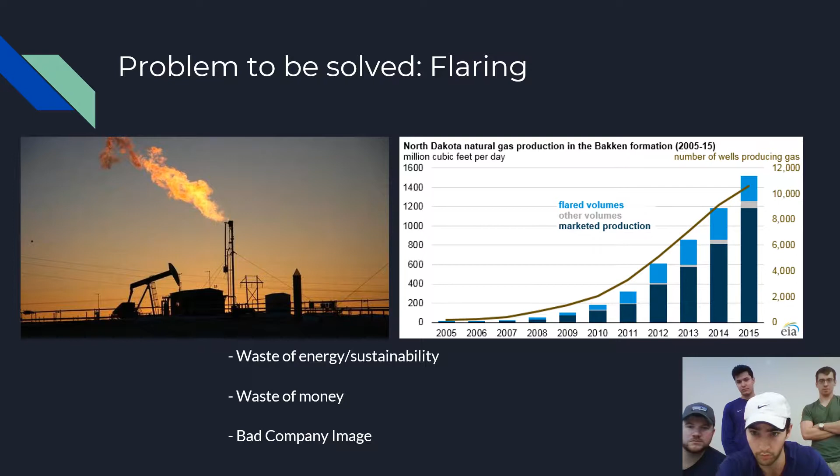As you can see from our image here, we have a picture of a well flaring, and it also shows how much natural gas has been produced from the Bakken up in North Dakota. One of the main problems is just the volume of gas that's been flared.

That's $187 million worth, 120, 158. That's a lot of money that we're just burning off into the environment, and it has negative impacts on the environment, as well as being a waste of money in the eyes of a company that could save a lot of money with our project.

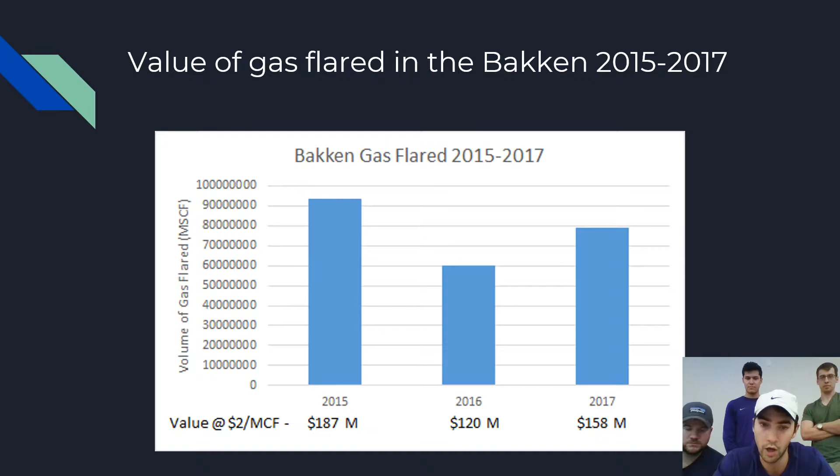So this is a problem that within a couple of years, at the end of the day, you're going to have to be capturing this gas. That's what government regulation is pushing for, and that's what our project is trying to solve.

There's a couple of reasons why we're not actually capturing this gas. But first, take note of this image. This is a satellite image, and you can see Minneapolis over here, lit up—that's a major city. But over to the left, you have the Bakken oil fields, and that's a satellite image of flaring. The fact that we can see this from space is a huge problem.

What causes this is that there are no pipelines near the well. If gas is at a low price, it's not economical to do sometimes. And it's also very dangerous to transport methane.

I was actually driving up towards Shreveport, and traffic got stopped at 10 at night—one of the tankers, one of the 18-wheelers, had blown up. So it's a dangerous business. Justin's going to take over here.

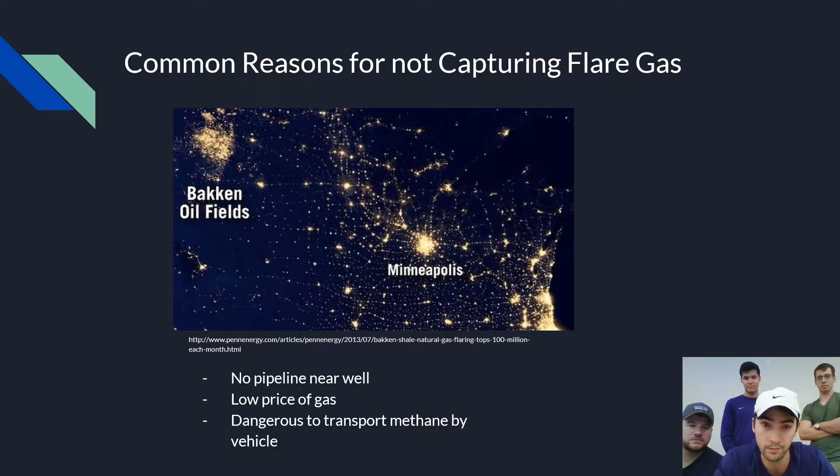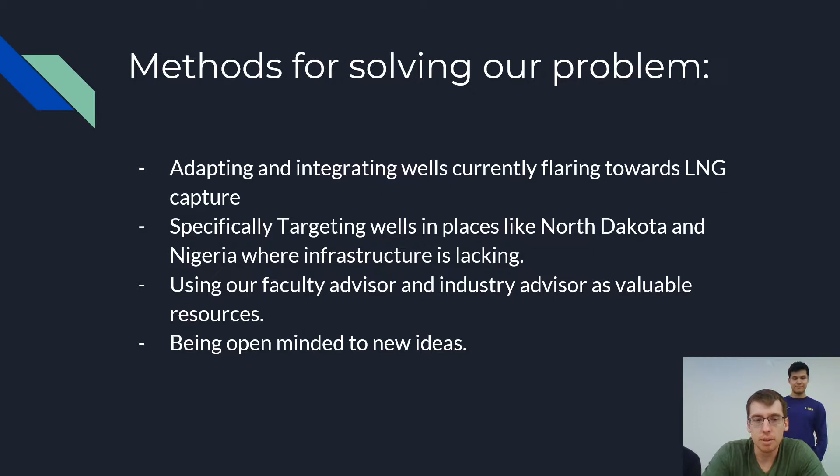We went over some of the methods to solving our problem. We looked at gas flaring and determined that liquid natural gas production would probably be the best bet in terms of being environmentally friendly, as well as possibly making a profit. So we targeted wells in North Dakota, and brought this to our advisor, who said it was a good idea. We decided to look more into what LNGs are.

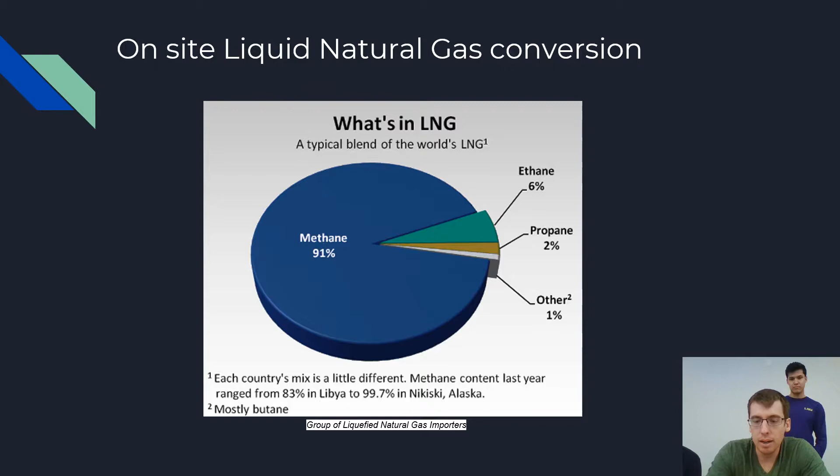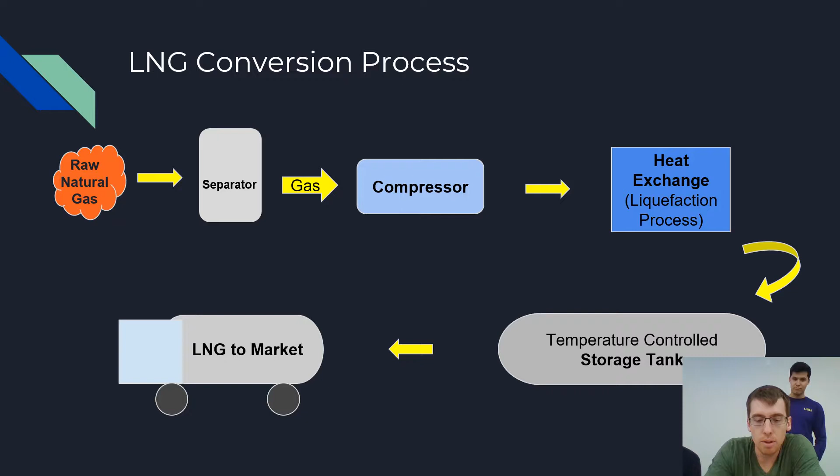Basically, it's methane that's been liquefied and refrigerated down to negative 260 degrees Fahrenheit. The process would be that the gas, instead of being flared off from the separator, would be compressed into a sub-cryogenic freezer that liquefies it at negative 260 degrees Fahrenheit, stored in a temperature-controlled tank, and then brought to market with an LNG temperature-controlled truck.

We thought we were doing pretty good, but it turns out some companies are already doing this process, such as GTUIT, Dresser-Rand, Galileo Technologies, and Micro LNG. So now our goal is to actually go over the process, learn about it, see if there's any way we could improve upon it, and really get more information about these companies, and hopefully educate ourselves as well as the industry execs we meet.

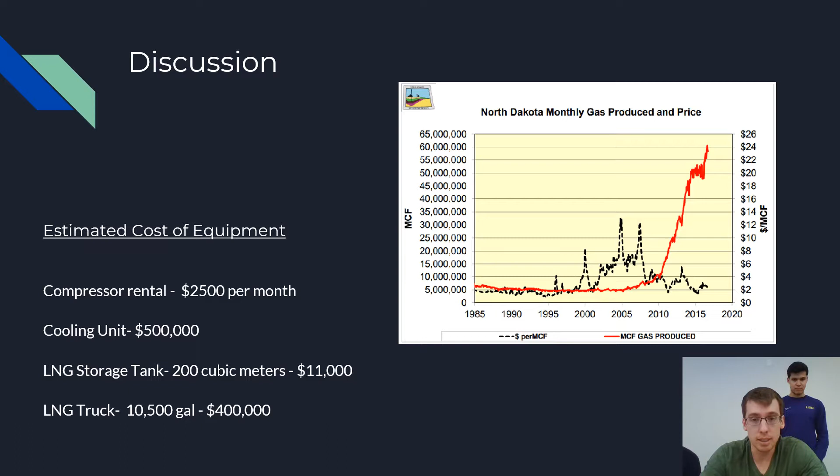From this gas graph, you can tell that there's a lot of money to be had when it comes to production of gas, and we put some schematics of what it costs. For compressors, we found that the big deal is to lease them out at sites. Typically, on average, it's around $2,500 for a compressor to be put on a site per month. So if you have a lot of gas that's worth a lot of money, it could be beneficial for a company.

Other costs are to get into natural gas, liquefied natural gas. You would need a cooling unit, which is a big bulk of the money, and an LNG truck.

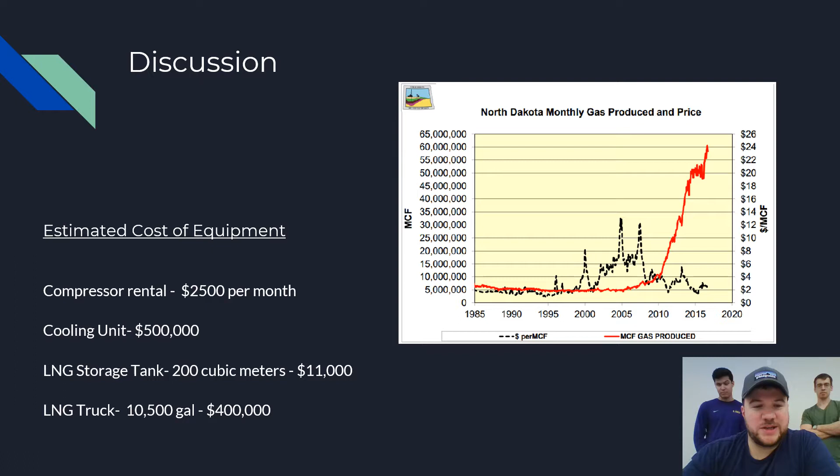Here we're at the completions phase of the well, and vapor quality is very important when determining what to do. Say, for instance, you have a well that makes 1,000 barrels per day of oil, and in that, per 100 barrels of oil is 20 MCF of gas vapor. So typically every day there's about 200 MCF of gas that comes out of the well. That needs to be either flared off, combusted, or captured, and then sold to market.

The vapors normally are around 1,000 BTUs, and in some areas they could be worth about 2,000 BTUs. That's good quality of vapor, and that just doubles the price. Gas right now would be $2.70 per MCF, which would turn that to about $5 and some change. So if we take that 200 MCF times the $5.30, you get about $1,000 per day.

So at a month, it's around $33,000. And for a compressor to be put on and moved onto site, it's about $2,500 a month. So you're netting profit from just that around $29,000.

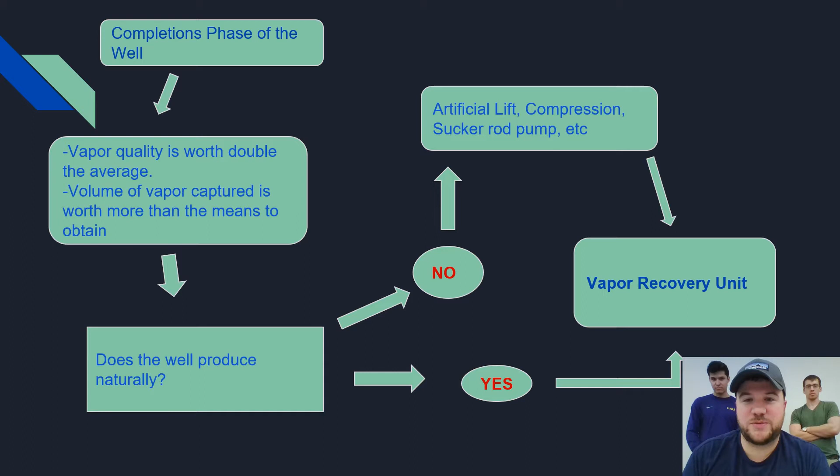There's other things that come into that you have to account for in costs. It could be pipeline fees or fuels burned off—it just depends. So you want to determine how much gas is being flared or how much gas is coming out of the well. Does the well produce naturally? If it does, you want a vapor recovery unit. If not, then you use compression or a sucker rod pump or artificial lift.

So, areas of application: we decided that the Bakken is where we want to focus all our energy, basically saying this is where the problem is—there's so much gas being flared. But we can't forget about the Barnett and the Haynesville-Bossier shale gas plays.

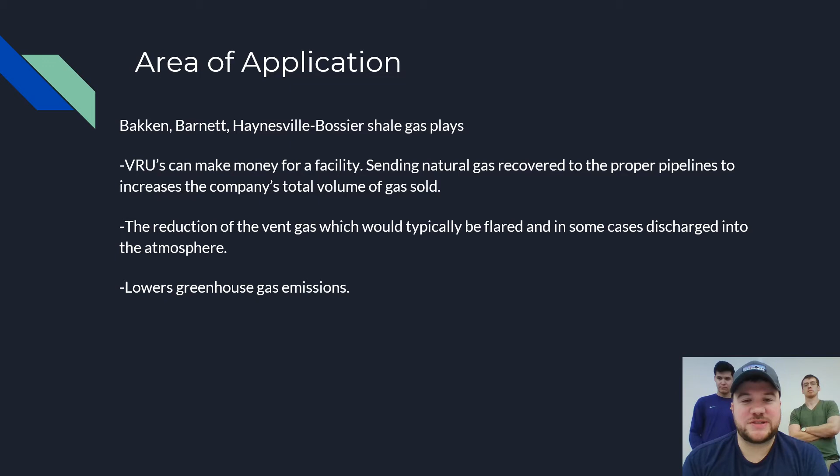Vapor recovery units, VRUs, their main purpose is to make money—sending that gas that we recover to the proper pipelines to increase the company's total volume of gas sold. It also lowers greenhouse gas emissions, which is a big deal, not just for the company, but a good thing for our society. Thank you.

In conclusion, from the information you've seen before, we can conclude that on-site LNG production is actually a viable solution for companies looking to increase profits per month, and for companies within a strict area that has government regulations requiring a high percentage of gas capture.

As far as future work goes, we're looking to reduce the cost of equipment and operations. As far as our project goes, what we have left before the main presentation—we want to obtain more accurate prices of equipment and maybe talk to some more companies currently employing these systems we talked about beforehand, and get some more specific examples.